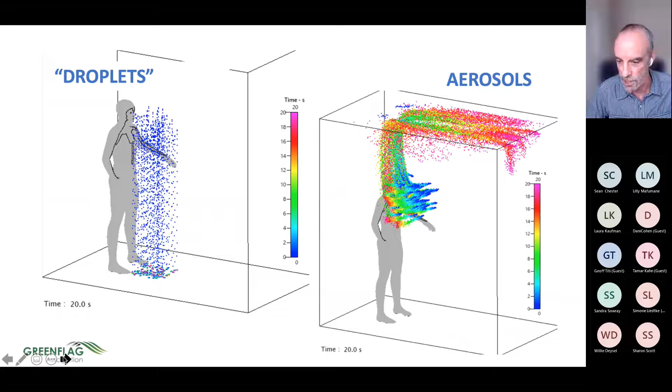We're going to say this again and again over the next 30, 40 minutes: this is the mode of transmission that has now been revealed to us and accepted to a large degree by experts. This is from the literature, and we can point you to various comprehensive reviews of this topic.

It captures the three basic modes of transmission, which we can call spray, touch, and inhale. What President Ramaphosa and the advisors were saying is that spray and touch were what we needed to be concerned about, and all the interventions and prevention measures were focused around spray and touch.

What we now understand is that spray and touch are not totally unimportant, but mainly the problem is inhalation of aerosols up close, within that 1 to 2 meter proximity, but also at long distance - meters away, 5, 10, 15 meters away in enclosed indoor spaces.

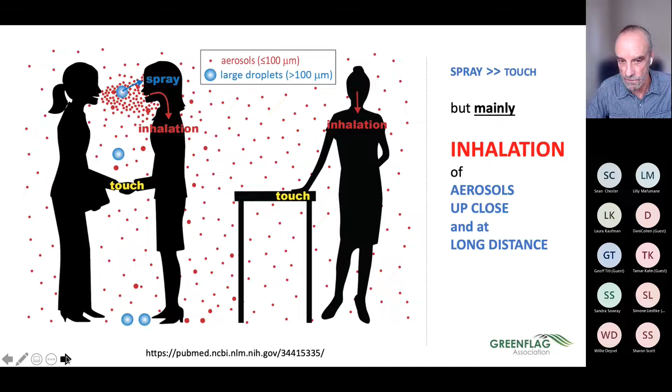There's a lot of science about the size of the droplets and which ones drop and fall and which ones spread more easily, which we won't go into today, but there's a dividing line of 100 micrometers, about 1,000 times the diameter of the coronavirus itself. Droplets 100 micrometers or more tend to drop, and the smaller ones tend to float away into the environment. That's the take-home message.

With any luck, this video will play for you, and Sean, you can let me know if we're successful or not, and whether the audio is coming through. Video so far, yes. No audio.

Okay, so this video is from the HSE, and it's illustrating the emission of viruses in an indoor space. This is not just the workplace, but any enclosed environment. Fresh air is a natural form of ventilation, or mechanical ventilation using fans or ducts, or it can be both fresh air and mechanical ventilation.

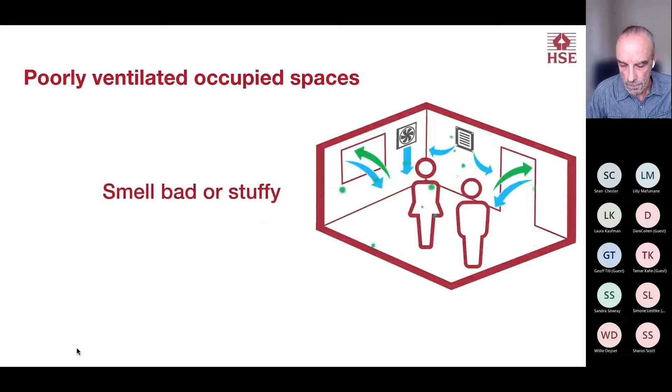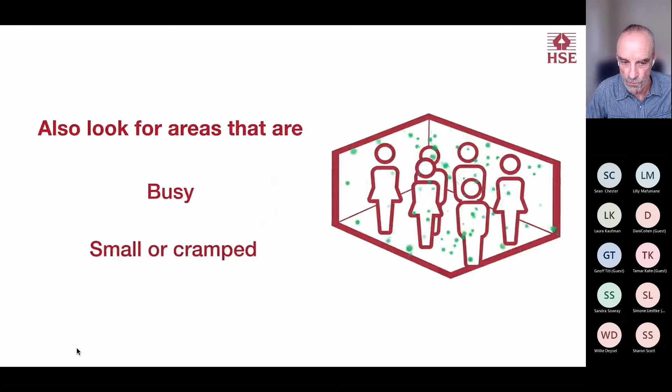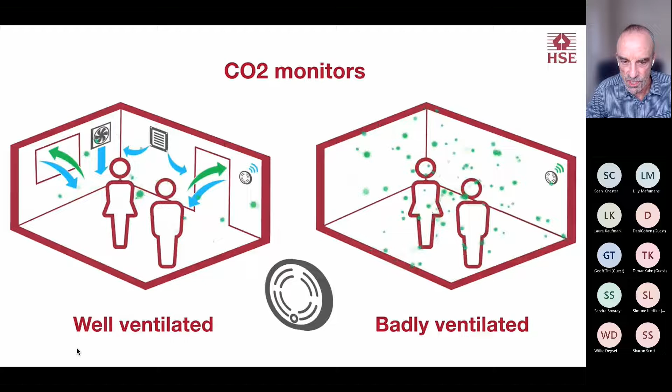Look for areas that smell bad or stuffy, or that don't have mechanical or natural ventilation. Look for areas that are busy, especially for a long time, and small or cramped areas. Carbon dioxide monitors - we'll speak about that in a moment or two. We're concerned about badly ventilated spaces. CO2 monitors can help us decide whether there's a problem with ventilation and can tell us whether our ventilation is working properly.

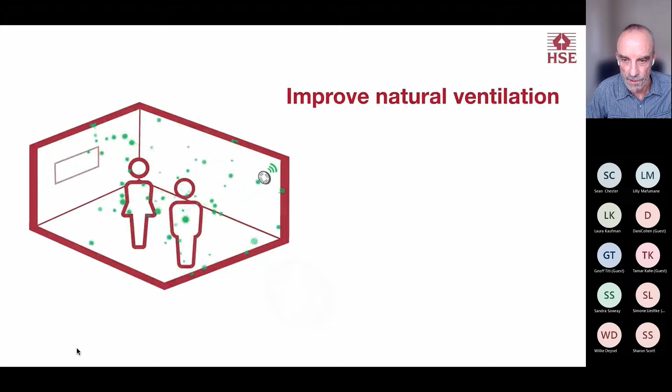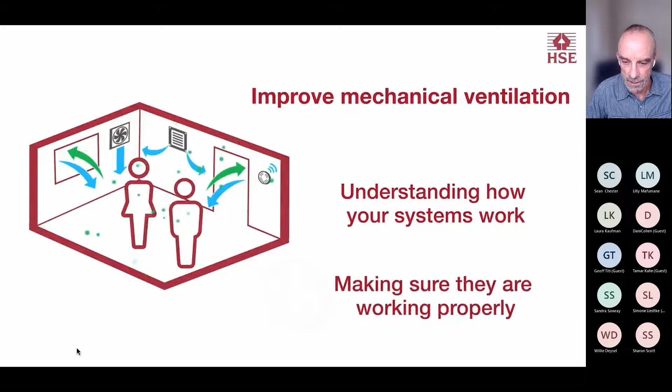Don't forget about other controls. We can improve natural ventilation by opening windows and doors. We need to understand how your systems work and make sure they're working properly. Don't rely on recirculation units - Sean will explain that further. They just move air and COVID-19 around and will prevent you from identifying poor ventilation. We can use air cleaning or filtration units, but windows and doors should be open as much as possible.

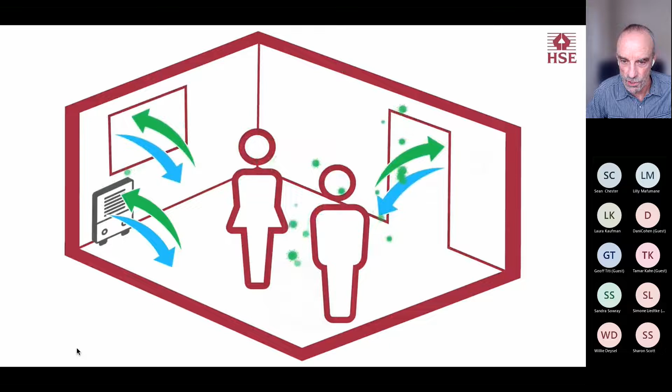Vehicles, whether driving or parked - ventilators on, windows open, and open the doors to clear the air between trips.

So this has been put out by the UK government, public health authorities, very belatedly, I might add. The UK is an interesting example - they're seeing 30 to 40,000 cases of coronavirus daily and 1,000 deaths a week. So I think we can take a leaf out of their book in terms of these videos, which have just been released recently, but perhaps not in terms of their overall approach to the coronavirus pandemic.

Sorry about the loss of audio there, but I was just relaying to you what the audio track from that video said. And again, we can refer you to some of those - they're quite good visual teaching.

Okay, so I have a few more things to show you before I revert back to Sean.

This is an important article that came out in April this year, summarizing 10 reasons in support of airborne transmission. The CDC, the World Health Organization, our own authorities only recently declared that COVID-19 was an airborne disease. The authors of this paper, 4 or 5 of them, are aerosol scientists and others, and this is a 1 or 2 page article that's very good about relaying the scientific reasons in support of what we're talking about today.

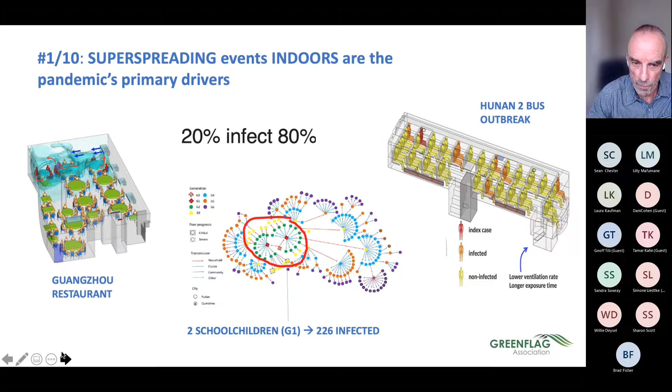And then the third is quite a nice story about 2 bus journeys, describing how many individuals got infected on each bus by one single index case, who was first on the larger bus illustrated here, and then a smaller one. So super spreading events occur in indoor spaces, and the really amazing thing that actually points to a strategy for controlling the pandemic is that 20% of individuals are responsible for 80% of the infections we see, and they're all about indoor spaces that become heavily contaminated with the coronavirus.

I'm sure we've all heard about the R0, which reflects the number of individuals infected by a single infected person. This is a diagrammatic illustration of that. Other diseases like influenza, a single person might infect one or two others. In COVID-19, a super spreading event shows that an individual might infect 3 or 4 others, but most of them don't infect anybody else. But then these large clusters tend to have a dominating effect on the pandemic overall.

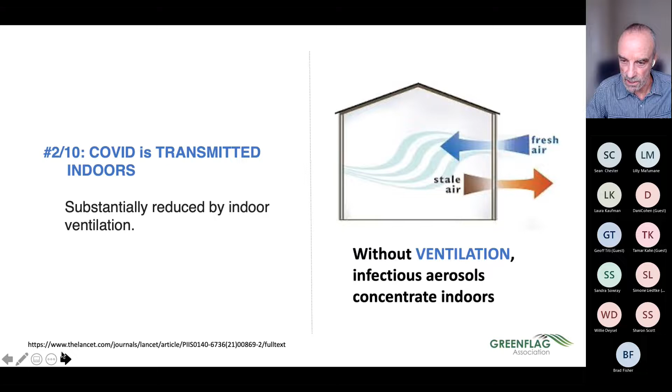And as I said, they're all in indoor spaces. So what happens indoors and what do we do about it is the rest of the story for today. The bottom line, the take-home message, is that COVID is transmitted indoors and it's substantially reduced by indoor ventilation. What is indoor ventilation? It's really allowing fresh air to come in and stale air to be expelled, and without ventilation, infectious aerosols concentrate indoors.

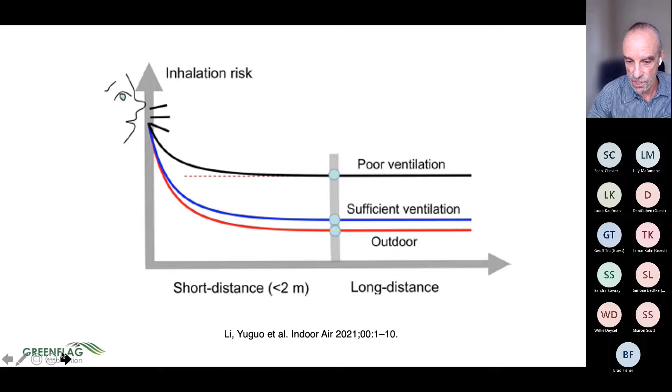And so this is a good paper by one of the experts in the field. This particular scientist was involved with the SARS epidemic in Hong Kong and described this pattern we're talking about today. So, if the theme of today is how it started, I'm saying that it was about droplets and contact, and how it's going is the idea that it's, yes, perhaps spray and touch to an extent, but it's predominantly about inhaling the virus and inhaling large doses of the virus.

One thing I haven't spoken to is the idea of activity, and what you're doing if you're an infectious individual spreading the coronavirus. The activity is the fact that infectious individuals who are breathing quietly will spread the coronavirus into an indoor space. But if they're speaking or shouting or singing, a loud vocal activity releases 10 times or more emitted particles, and therefore is much more of a risk to other individuals.

The big story really is about indoor air quality in general and what implications this has for our health as a society, and particularly in South Africa, where tuberculosis kills 50 or 60,000 people every year, an integrated approach to indoor air quality has the potential to dramatically reduce TB, the 10,000 or more influenza deaths each year, and possibly even to limit hospital-acquired infection if we really pay attention to air in healthcare facilities.

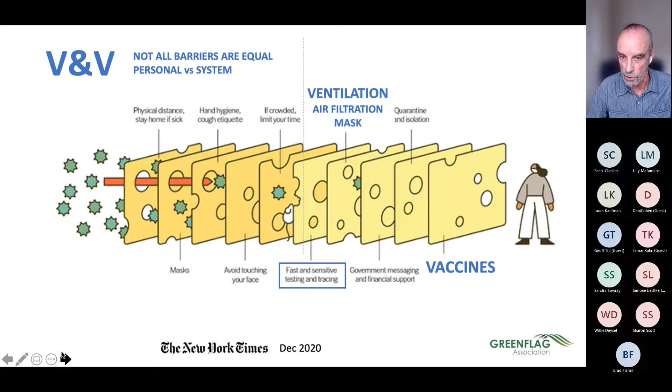Not all barriers are equal. Some barriers are personal, and so people need to take responsibility for their own behavior, but some of these are systemic. Vaccination is obviously a society-wide imperative initiative that we should all get vaccinated. It's now available to all of us, and ventilation similarly is something that we could take control of.

So Sean, I'm going to flip back to you to cover the remaining slides, and I'll cover the presentation.

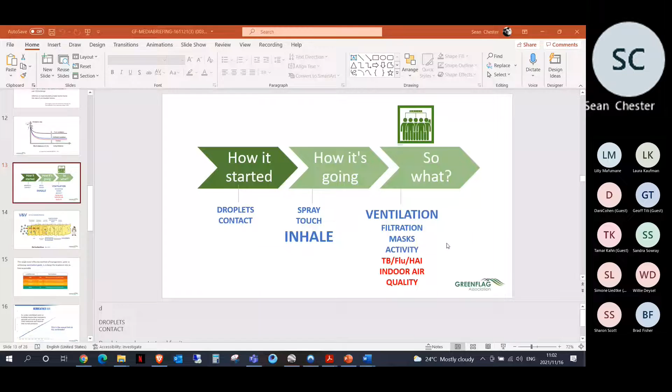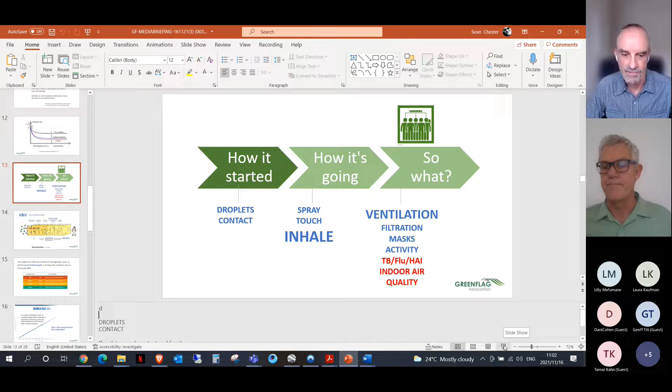Thank you, Gareth. Really appreciate that, really nice overlay of getting us to this point. So folks, this is where we are. What are our ventilation goals? What is the Green Flag Association all about?

What we're trying to do is keep the incidence rates as low as possible. Zero would be great, but obviously we'll never get to that. We need to start working with understanding that this is going to become an endemic disease, and we will be working with it or living with it for time immemorial, I think. We need to just understand that's one of the things we have to do.

But one of the things that is really important is that in order to keep the incidence rate down and actually get to a normal life, the advantage of what COVID has actually brought us is this absolutely imperative that if we integrate it with other disease managements, like around influenza, tuberculosis. Gareth, tuberculosis kills how many people a year?

2019 figures were 58,000 deaths. Influenza? 10,000. Oh my gosh!

So you can see that this integrated approach is that as a paradigm, we've actually recognized internationally that these diseases are all spread by the airborne route, and what COVID is doing and is hopefully going to be doing through into 2022 is actually upgrading building standards in terms of retrofitting them and working them out.

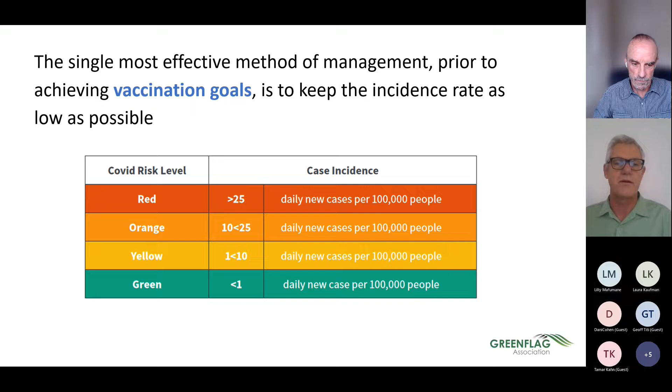Yeah, I think for policy making and endpoints, this is one of the key issues. I think everybody wants to know when does the mask come off, and I think this is one of the factors that policymakers are considering or should consider.

And when we're talking about ventilation and our side and the Green Flag Association side of it, it is all about rebreathed air. Remember, when you're outside and you're socializing outdoors, meeting outdoors, restauranting outdoors, sporting outdoors, or whatever it is, you are not breathing in rebreathed air. So what is rebreathed air? It's actually just exhaled air.

So anybody that exhales in an enclosed space, that air becomes airborne, and then you would actually be potentially breathing it in. And so there's this direct correlation between disease and incidence of disease. And this is where we start getting right to the crux, the real bones, right underneath the meat of everything.

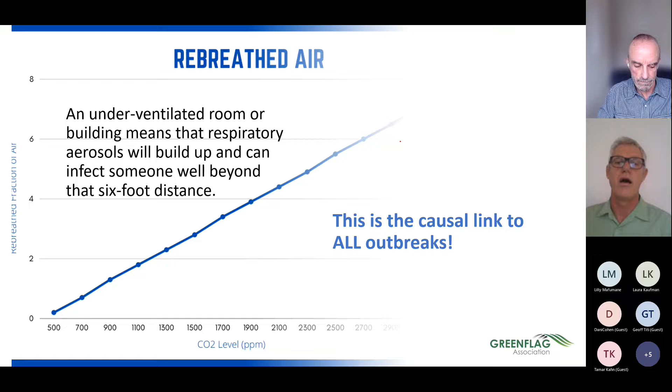So if you're looking at a wall-mounted air conditioner inside a building, that is generally just a recirculation system, and it might make you feel cool, and it's only when you bring out the carbon dioxide meter that you recognize you're breathing in a hell of a lot of rebreathed air, because that carbon dioxide concentration is actually on a skyward pivot all the way to the top.

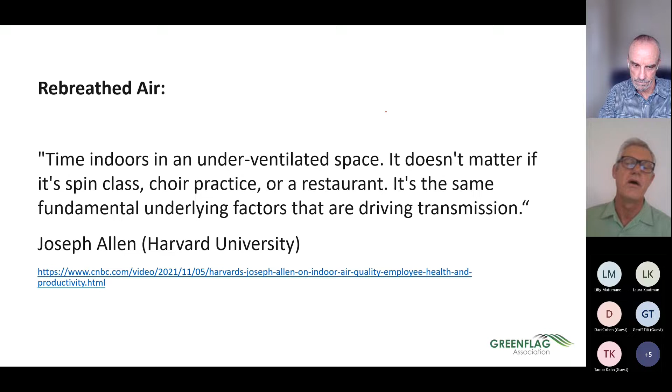Joseph Allen is one of the guys I've been following all the way through. He's a high academic scientist in aerosol science, understanding the causal link between carbon dioxide and the spread of disease. Time indoors in an underventilated space - it doesn't matter if it's a spin class, choir practice, or a restaurant. It's the same fundamental underlying factors driving transmission. Whatever people are doing indoors is what is driving the transmission, whether it's in a classroom, a vehicle, a taxi, or public transport. That's what's driving it.

This makes me really quite despondent and nostalgic. Back in January 2021, I stated emphatically that there seems to be this continued lack of clear messaging or coordinated policy response from national government and big business to the pandemic and indoor air quality beyond COVID-19. This is something I'd like to see us change. As the media, I would hope you guys would engage in the idea that we need to stop perpetuating the dogma, and change everything to be around ventilation, because that's really where the crux is, where the tire meets the road.

So what are we asking for? If this is the why, this is the limbic system of exactly what it is - this is what resonates with scientists all over the world. When you're breathing rebreathed air, it is contaminated air. Ventilation is key to ending the pandemic, and the endemic as it goes for tuberculosis, as we get COVID into an endemic situation, to dealing with influenza, and stopping the amount of death and disease burden we're carrying as a country and as a planet. If you take nothing away from this today, take the idea that rebreathed air is the situation - we need to ventilate it out of buildings so that wherever we are, socializing or working, we're breathing really good and decent air.

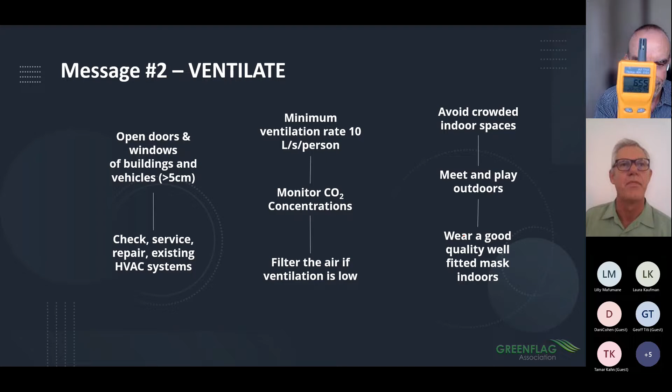Yeah, certainly, and that correlates with the video you posted earlier and the definition of what ventilation is. Remember, the very definition of ventilation is not an oscillating fan or when you feel air movement on your skin. The idea of ventilation is the introduction of fresh air through an entire area that it services. So through-flow ventilation doesn't occur just with one window open inside an area - you need an opposite air aperture, window or door open so that it actually travels all the way through. So yeah, thanks for that, Geoff.

Keep us posted if it changes again.